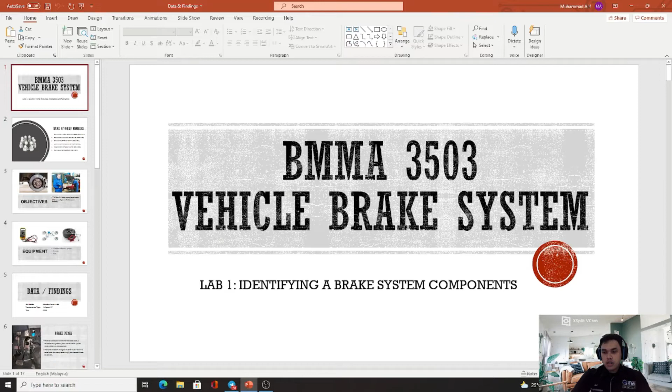My name is Muhammad Alif Haikal bin Azahari, and today my group and I will be presenting Lab 1, which is identifying brake system components. For today, the main objective of this lab session is to identify brake system components and to be able to name all parts of the brake system assembly.

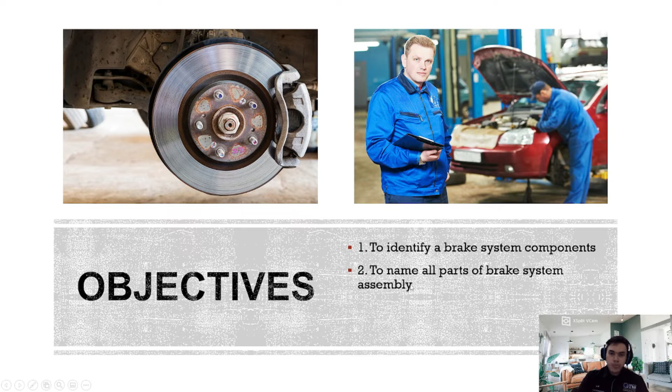As for the equipment, we need to use the complete brake system unit, which is similar to the brake system that we have in our standard car. This is just for us to see the similarities. Secondly is the multimeter or ammeter. And lastly, tools to disengage the tire, for example a jack or the wheel wrench. This may ease the process as well as make it easier to understand every part of the brake system assembly.

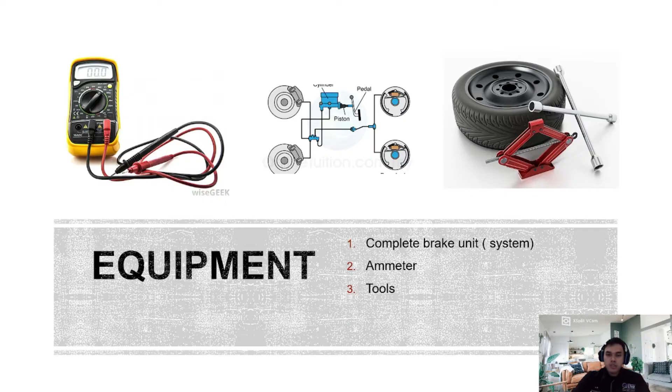Alright, hello everyone. Today I'm going to do the procedure of checking the airtightness of the brake booster. First, depress the brake pedal several times with the engine off until there is no change in the pedal travel. Then depress and hold the pedal, and start the engine. As you can see, I have depressed the brake pedal several times, and this is the limit. Now I'm going to start the engine.

The result: if the pedal goes down slightly, the operation is normal. Right now the pedal goes down, so the operation is normal. Then we start the engine and turn it off after 1 or 2 minutes, and depress the brake pedal several times slowly. We're going to fast forward 1 or 2 minutes and then turn off the engine. Okay, the engine has been turned off.

The result: if the pedal goes down further the first time but gradually rises after the second or third depression, the servo is airtight. As we can see, the pedal goes down the first time but then gradually rises after the second or third depression. So the servo here is airtight.

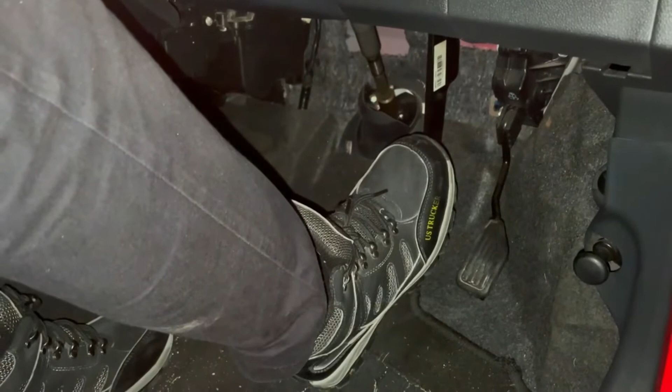Alright, I have already stopped the engine while the pedal is depressed. After 30 seconds, there is no change in the pedal travel. So the result is the servo is airtight. That's all for my part.

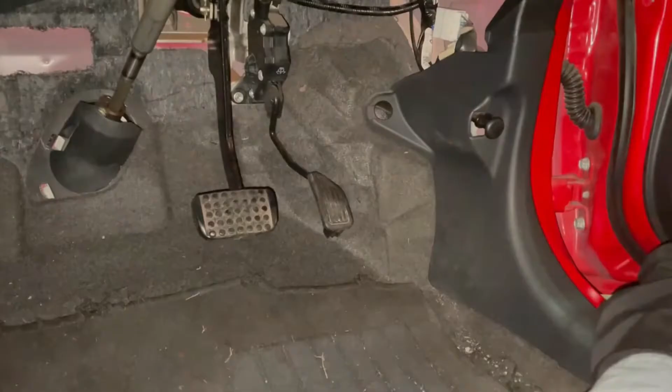Hello, my name is Muhammad Jeffrey, and I will continue the procedure on how to check the brake pedal and adjust the brake pedal height. First, to check the brake pedal and adjust the brake pedal height, turn up the carpet under the brake pedal. Then we measure the brake pedal height from this to the surface like this.

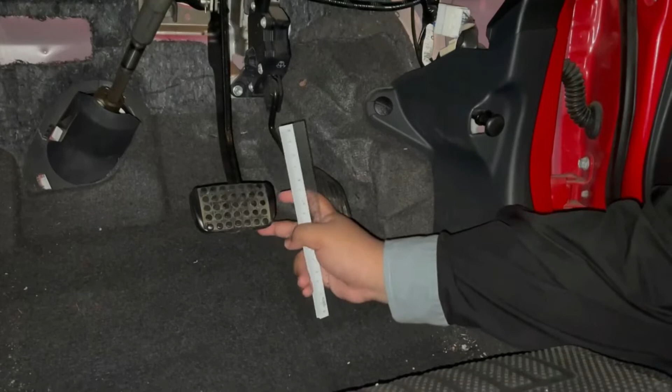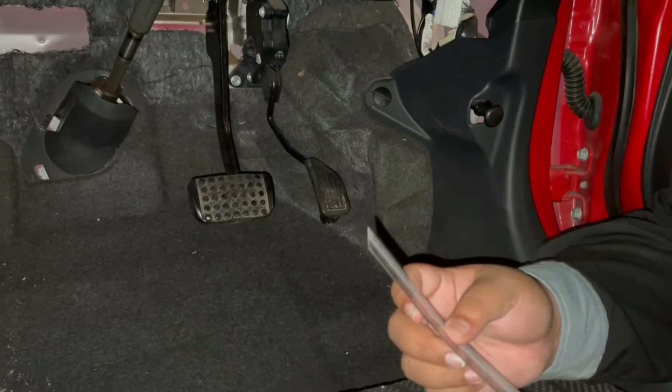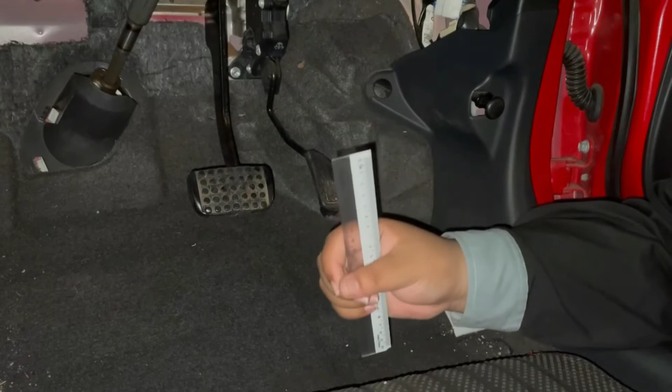When we check, the pedal height is within the standard value, which is 162.8 until 165.8 millimeters. So we will not adjust the brake pedal height. If the brake pedal height is not within the standard value, we must adjust it. To adjust the brake pedal height, first disconnect the stop lamp switch connector.

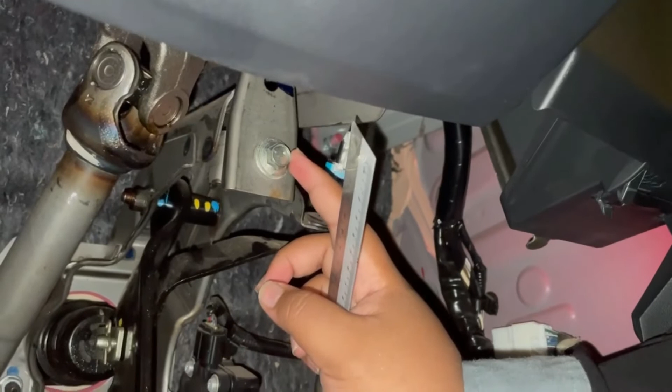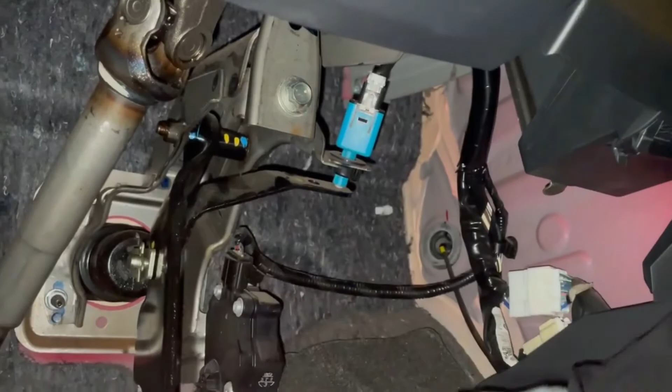This is the blue and white socket. Then we adjust the brake pedal height by turning the operating rod with a plier. First, we loosen the rod lock nut here, and then we adjust until the brake pedal height is at the standard value. Then we secure it by tightening the lock nut of the operating rod, and push the stop lamp switch in the direction of the pedal stroke until it stops.

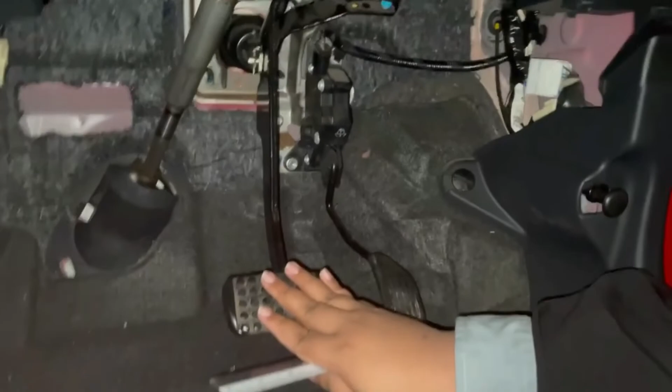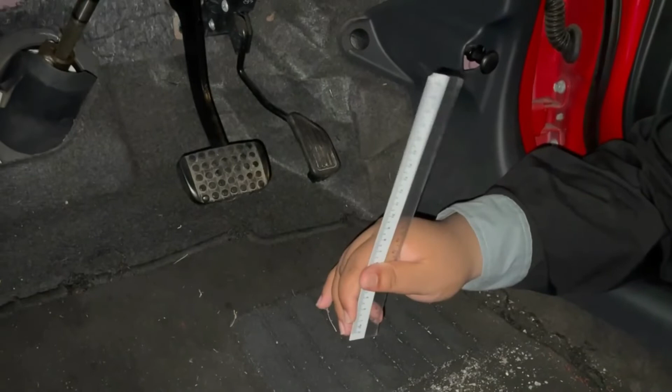After that, lift up the pedal until the operating rod is fully extended. Then connect again the connector of the stop lamp switch. And lastly, check whether the stop lamp at the back illuminates with the brake pedal unpressed or pressed. After we adjust the brake pedal, return the carpet to its original condition. That's all to adjust and check the brake pedal height.

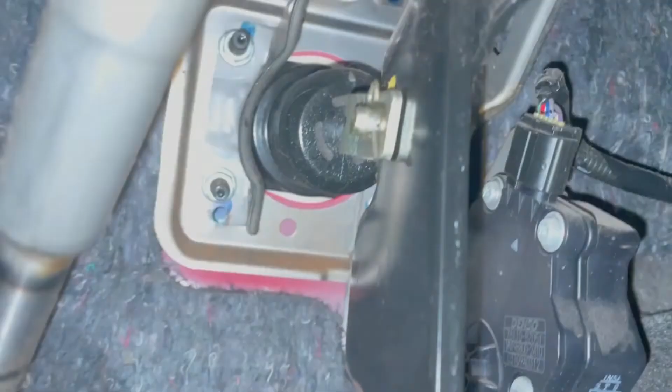Hello, my name is Muhammad Hafizin Arif, and I'm going to continue with how to disassemble the brake pedal. Check this out. To disassemble the brake, this is the brake. For the first step, we have to disengage the pin. This is the pin clip; we have to pull it out. Second, we have to disconnect the stop lamp switch connector, which is this, over here.

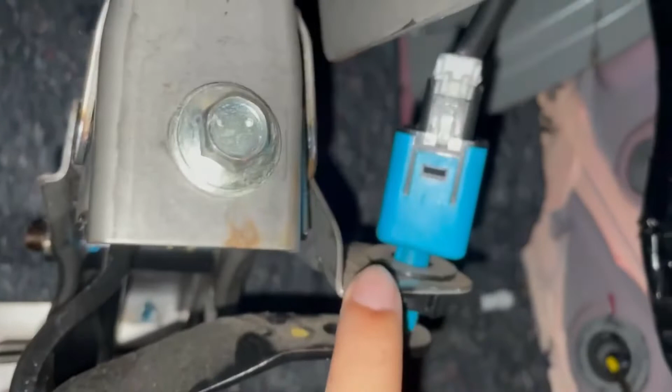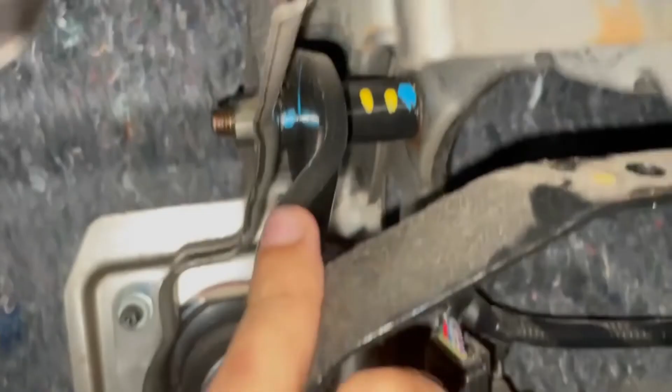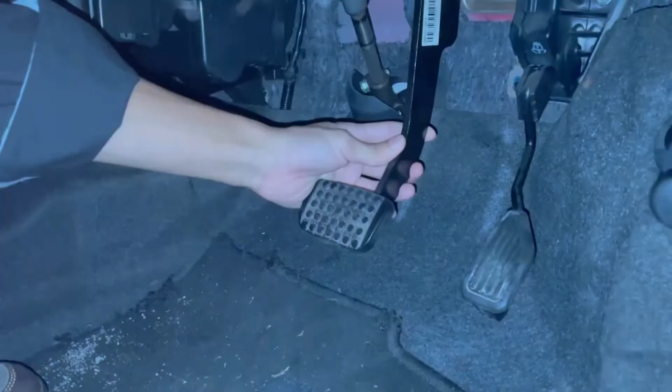To disengage this, we have to pull the white socket out from the switch, and then we have to remove the brake pedal shaft. This is the brake pedal shaft. We have to loosen the nut first using the 12 wrench. Then we can remove the shaft, and lastly, we can remove the brake pedal. That's all on the procedure of how to remove the brake pedal. That's all from me, Muhammad Hafizin.

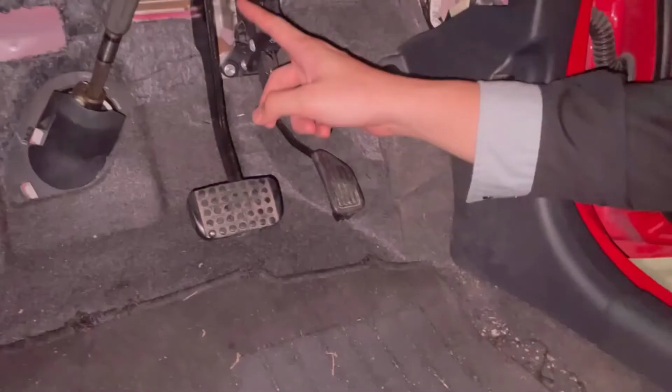Okay, now I will present about the stop lamp switch check. We need to first prepare the multimeter. The function of the multimeter is to check the continuity of the stop lamp switch. First, we can start by disengaging or pulling out the socket. Here, the blue color.

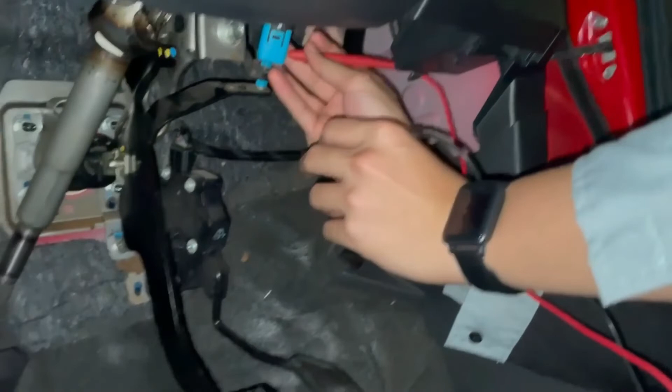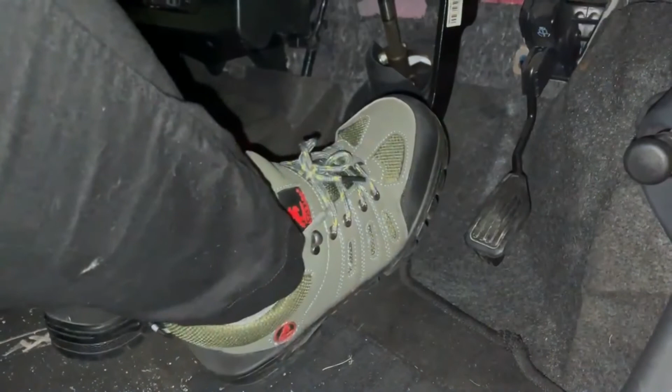Secondly, we can now connect the multimeter to the stop lamp switch and check whether or not there is continuity when the plunger of the stop switch is pushed and when it is released. When the brake pedal is depressed, as we can see here, the brake lamp will light up, and when the brake pedal is released, the light will turn off.

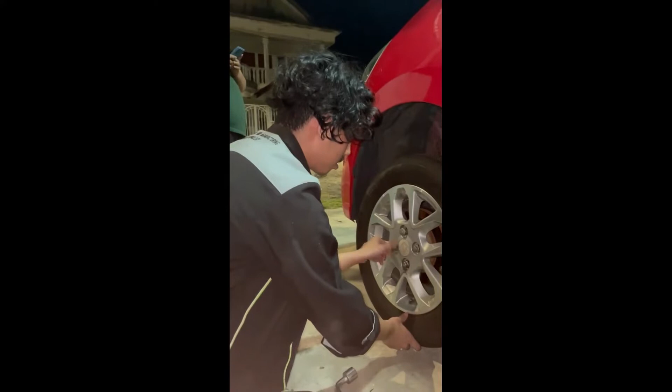So I will continue this part. Firstly, we have to jack the car. For the second step, we have to loosen the tire. We have to loosen the nut first, and then we take out the tire.

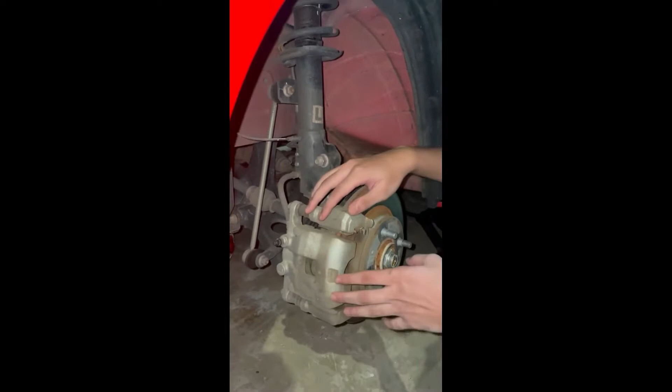Next step, to assemble the brake pad. We have to loosen the nut, which is the 12 size, and after we have loosened the nut, we can pull up the brake caliper, and then we can replace the brake pad with the new one.

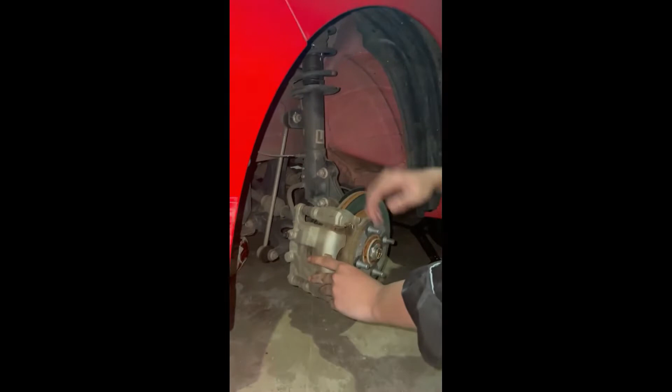Next I will show the bleeding process. For the bleeding process, first we are going to open the brake fluid reservoir. Next, we're going to remove this cap and loosen this screw nut.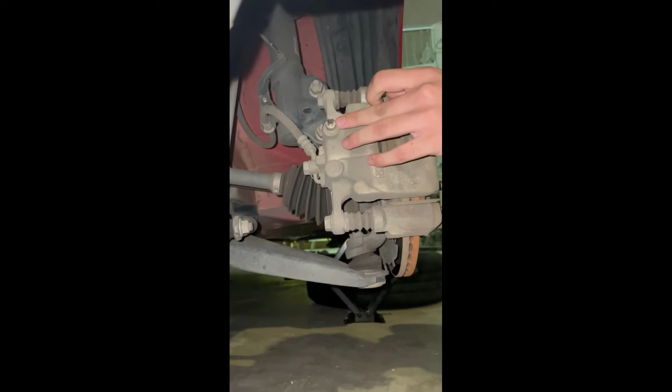Bismillahirrahmanirrahim. Assalamualaikum warahmatullahi wabarakatuh. My name is Muhammad Alif Haikal bin Azahari, and I will be presenting the data and findings. Our car model is Perodua Axia 1.0 SE, the transmission type is 4-speed automatic, and the year of manufacture is 2015.

For the first part, the brake pedal. When you press your foot down on the brake pedal, the connected lever pushes a piston into the master cylinder, which is filled with hydraulic fluid. This hydraulic system multiplies the force of your foot on the brake pedal into enough force to apply the brakes and make the car stop or slow down.

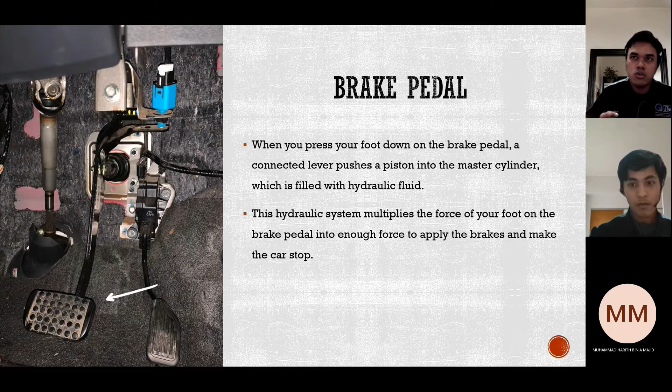The next part is the brake rotor. A brake rotor is attached to the axle, usually sliding over the lugs that also secure the wheel to the hub. They provide a contact surface for the brake pads, which under load generate friction, convert kinetic energy to heat, and slow our vehicle to a complete stop.

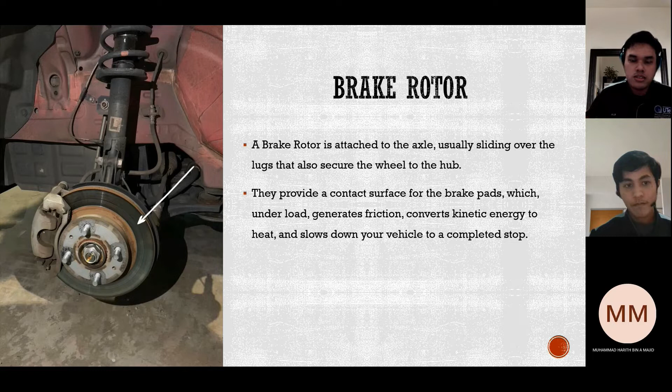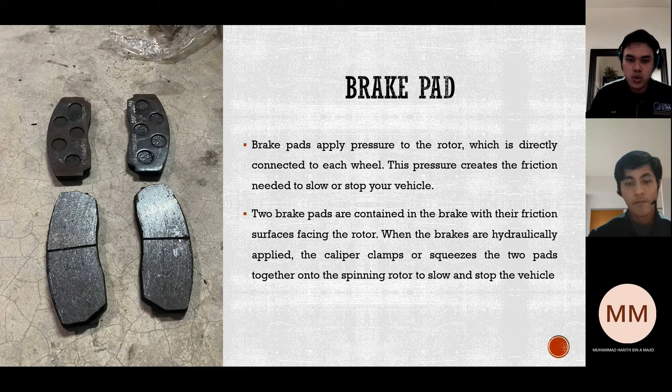The next part is the brake pad. The main function of the brake pad is to apply pressure to the rotor, which is directly connected to each wheel. This pressure creates the friction needed to slow or stop our vehicle. Two brake pads are contained in the brake with their friction surfaces facing the rotor. When the brakes are hydraulically applied, the caliper clamps or squeezes the two pads together onto the spinning rotor to slow and stop the vehicle.

The next part is the brake switch. A brake switch, or brake light switch, is an electrical switch that turns our brake light on when you press the brake pedal. It's an integral part of our braking system and lets the driver behind you know that you are slowing down.

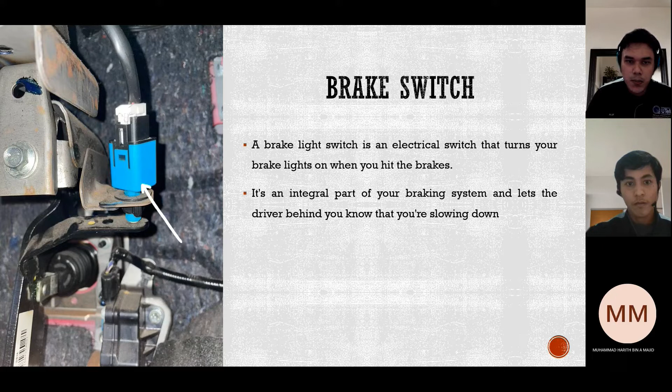For the brake caliper. Brake calipers are a specific component of your braking system that is crucial for the function of your brakes. Calipers are found on each wheel and work to squeeze the brake pad against the rotor in an effort to slow the spin of the wheel and get the vehicle to reduce its speed.

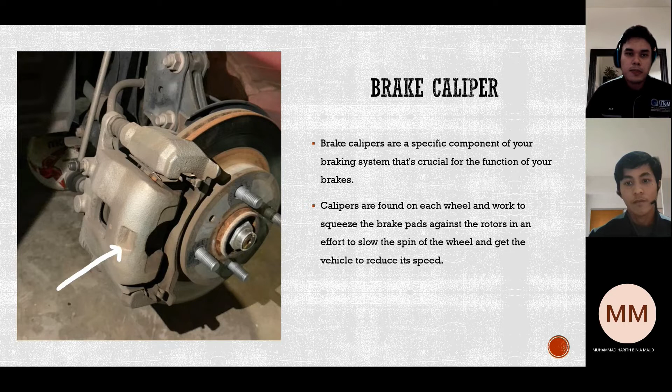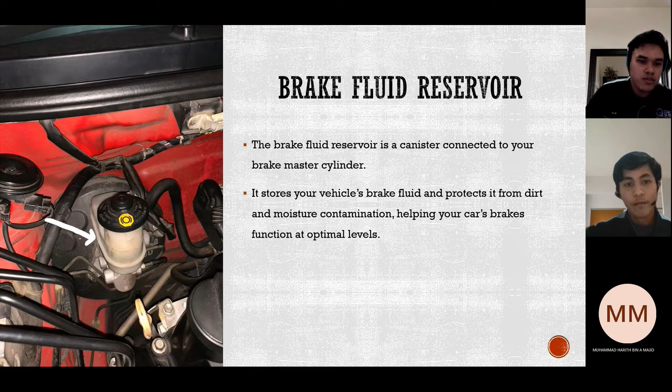Lastly for my part is the brake fluid reservoir. The brake fluid reservoir is a canister connected to your brake master cylinder. As you can see, it stores your vehicle's brake fluid and protects it from dirt and moisture contamination, helping your car's brakes function at an optimal level.

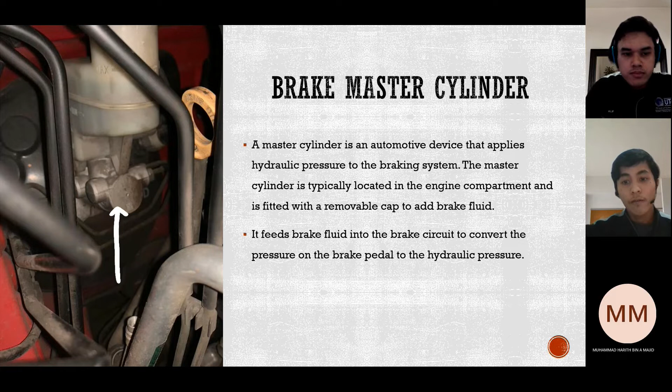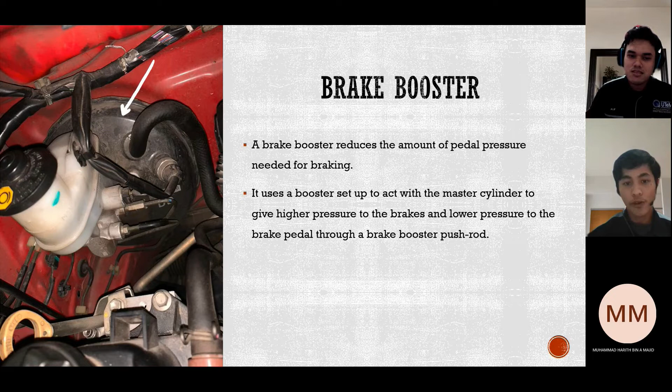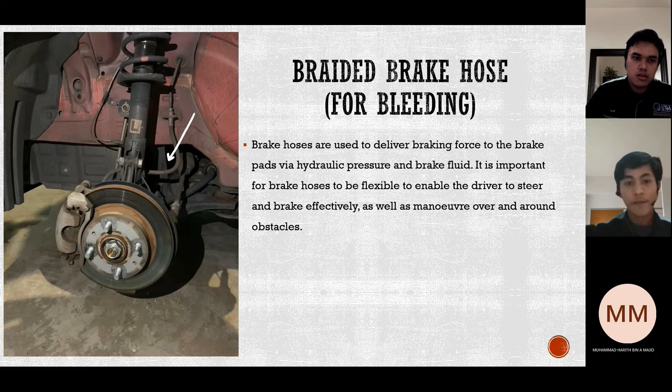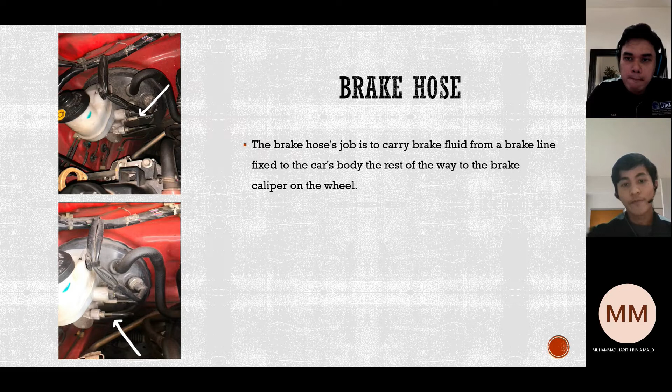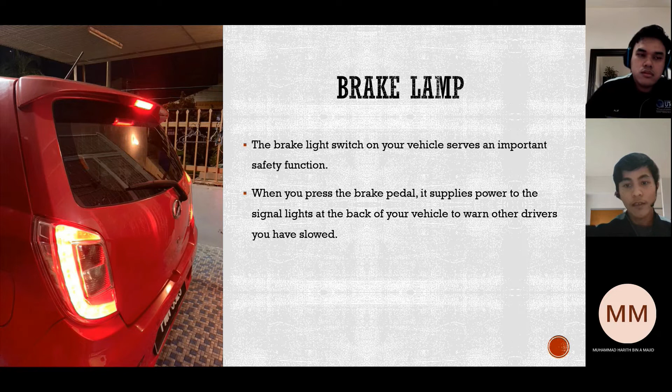Okay, for the last part is the brake lamp. It's commonly known as the brake light switch on your vehicle, serving an important safety function. When you press the brake pedal, it supplies power to the signal lights at the back of your vehicle to warn the other drivers that you have slowed down your vehicle.

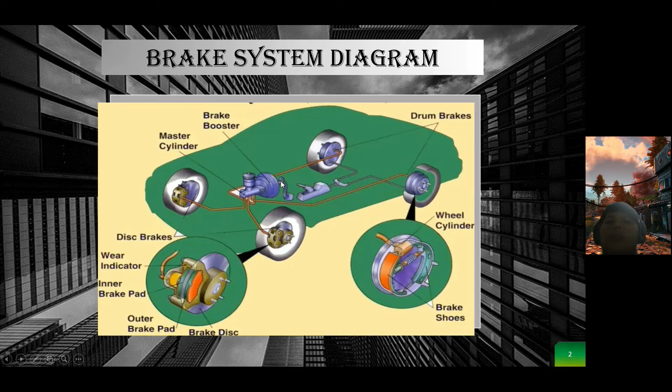So the mechanism of the brake system starts when we press or release the brake pedal. When we press the brake pedal, the brake booster and master cylinder will detect it, and then transfer the hydraulic pressure from the brake fluid through the brake lines and hoses to the disc brake and drum brake. So the mechanism is to transfer the hydraulic pressure from the brake pedal to the disc brake or drum brake.

Next, I will continue to the electronic brake system. We have 2 electronic systems in this car. The first is ABS, which stands for anti-lock brake system. The function of ABS is to prevent the wheels from locking up and allow the driver to steer in a good condition when the emergency brake is applied. So the function is to prevent wheels from locking up and allow the driver to steer in good condition.

And then EBD. EBD stands for electronic brake force distribution. The EBD function is to distribute the braking power or force to all wheels of the car. So the car will brake in a good condition and with the same force.

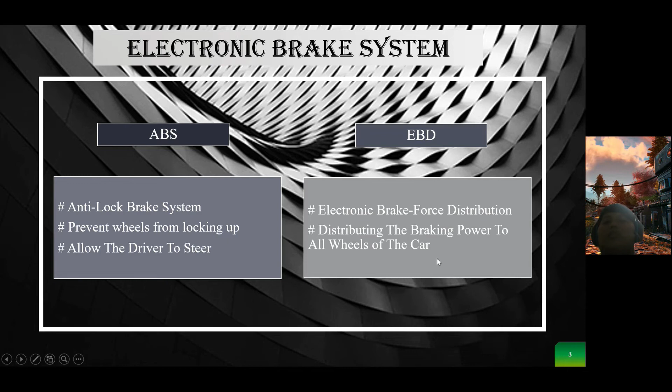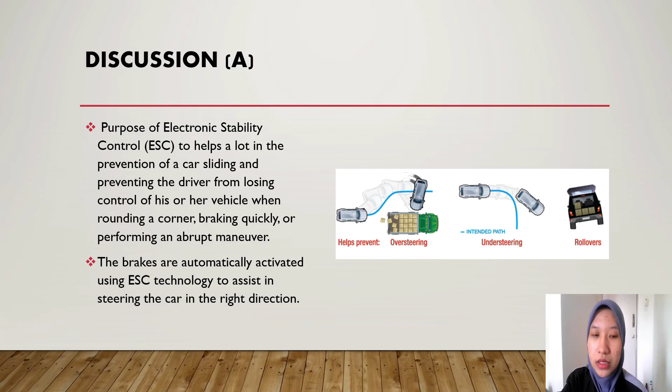Okay, for question A for discussion in this lab, the purpose of ESC, electronic stability control, is to help a lot in preventing a car from sliding and preventing the driver from losing control of his or her vehicle when rounding a corner, braking quickly, or performing an abrupt move. Next, the brakes are automatically activated using ESC technology that assists in steering the car in the right direction.

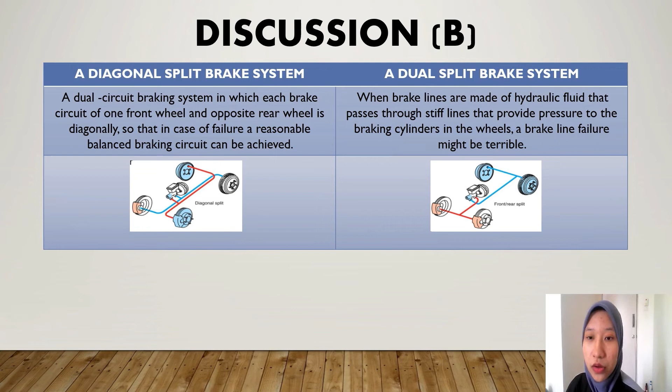Okay, for the last question, C, the difference between oversteer and understeer. Oversteer is when the car turns more than the driver desires while maintaining a steady steering input, and oversteer might manifest itself in the form of a tail sliding out or a full spin. When the rear wheels lose traction before the front wheels, oversteer occurs. Acceleration requesting too much of the rear tires, a fast weight transfer forward with the throttle removed or abrupt braking, or too much steering input can all cause this.

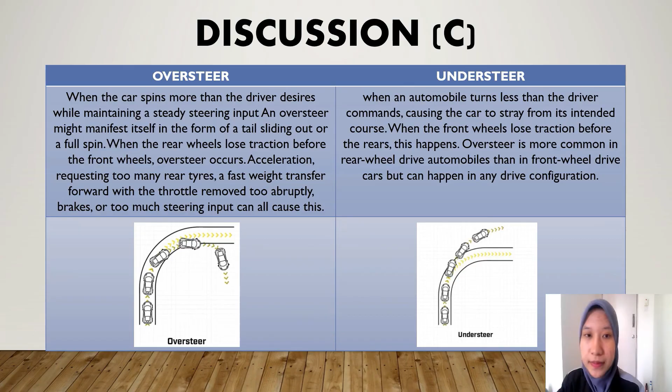Okay, for the conclusion, at the end of this lab activity, there are many things that we learned and observed. We managed to identify brake system components and name all parts of the brake system assembly. Next, we also successfully performed several tests of brake performance and brake system maintenance. Last but not least, we know the difference between a diagonal split brake system and a dual split brake system, and the difference between oversteer and understeer. And don't forget the purpose of ESC, electronic stability control.